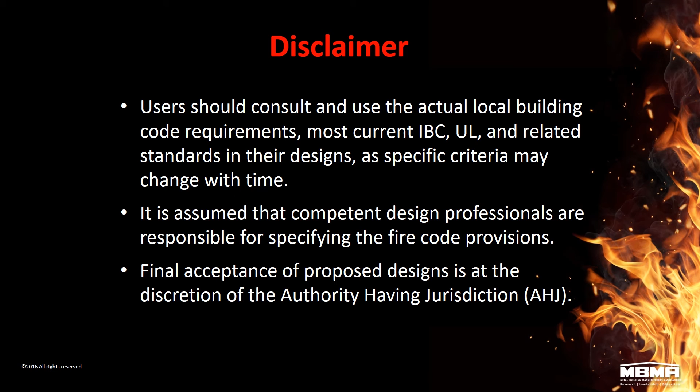Part 5 is exclusively on fire resistance rated joint assemblies as well as continuity joints, and we will discuss at length the important distinction between those—between a rated joint and just the ordinary, if you will, continuity joint.

The previous parts of this series: part 3 was on columns and roof-ceiling assemblies, fire resistance rated assemblies, sponsored by MBMA, and the preceding part 4 of this series was on fire resistance rated wall assemblies. Again, this is a 5-part series, and this is the final part of that series on joints.

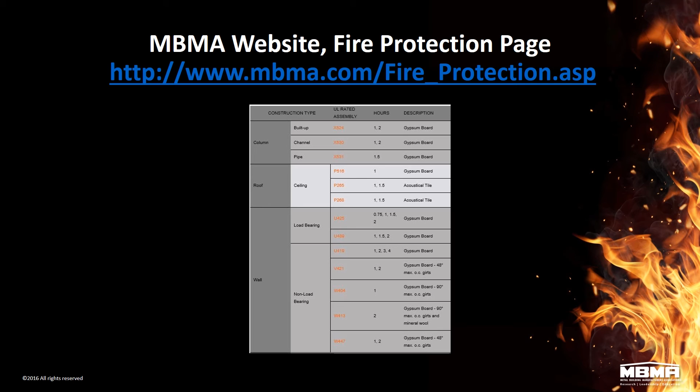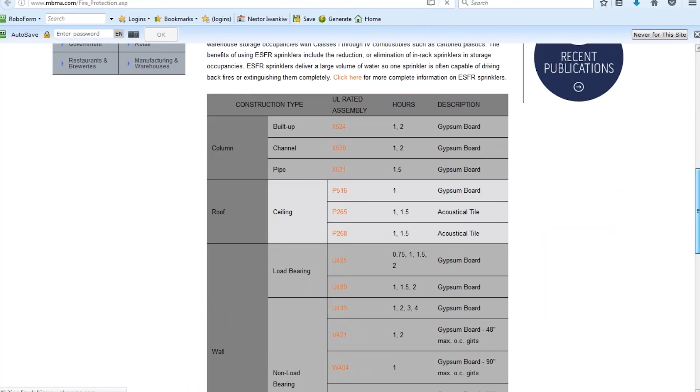So here is the MBMA website, and in particular the fire protection part of it. If we scroll down, we will see this table in its entirety, and towards the bottom of the table we get to the subject matter of this presentation, which is the joints—and here's all of them.

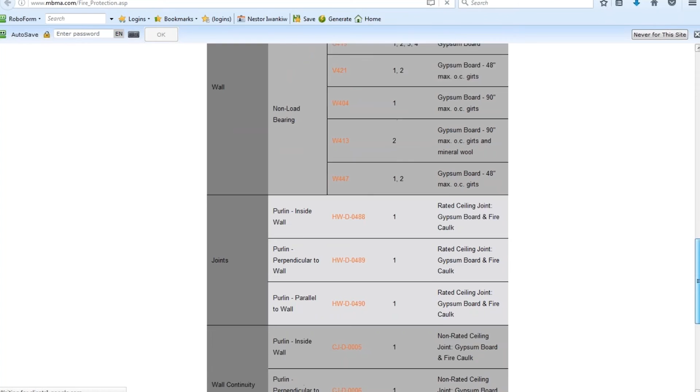So there are basically 6 assemblies that MBMA has sponsored and developed over the last 5 years or so. Some are the fire resistance rated joints—these are your HW assemblies. The other ones are what's called continuity joint systems, prefixed as CJ, so continuity joints.

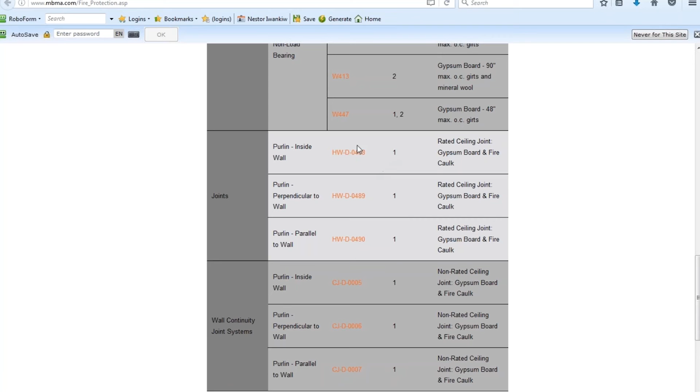A brief description and view of what they consist of. They're all for 1 hour, and if we click on one of these, we'll be directed to the UL online database, where we can see the complete assembly as specified by UL.

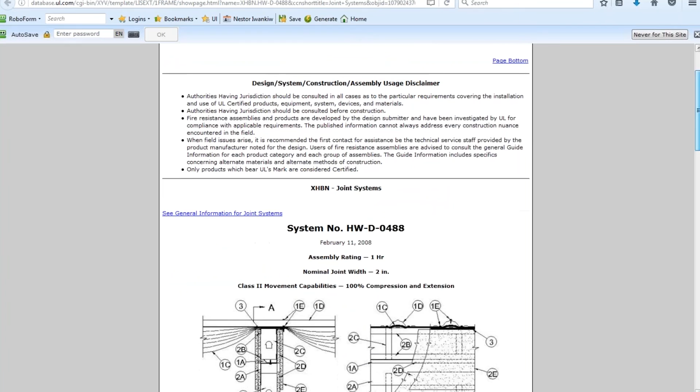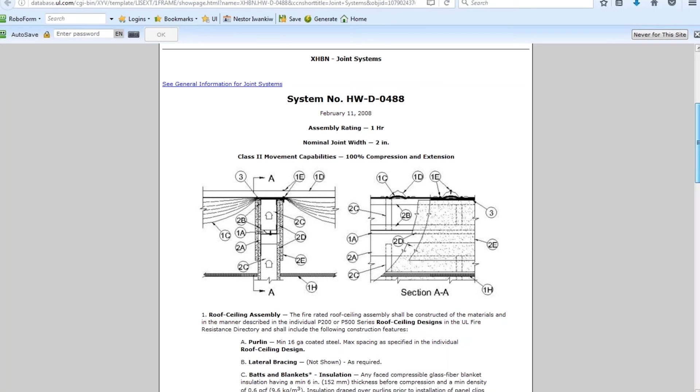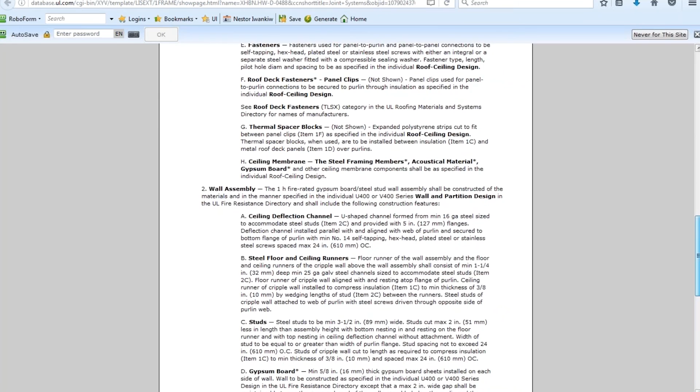Here you can see the head of wall, the cross-section view, the 1 hour rating, the nominal joint width, movement capabilities, and then the full listing with all of the components, items, and installation requirements for the head of wall assembly itself.

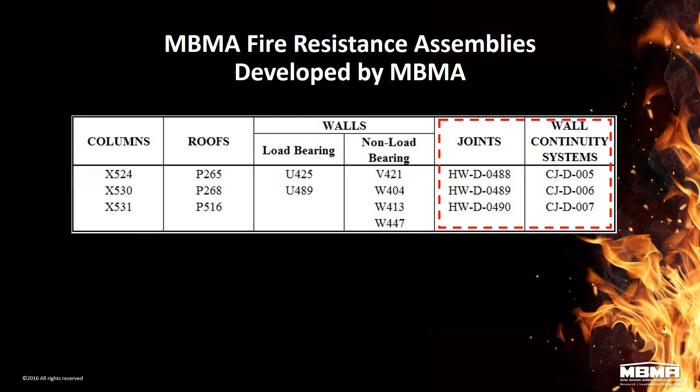So here again we just summarize and highlight these 6 assemblies. 3 of them are joints and 3 are wall continuity systems, and we'll describe what the difference is between them.

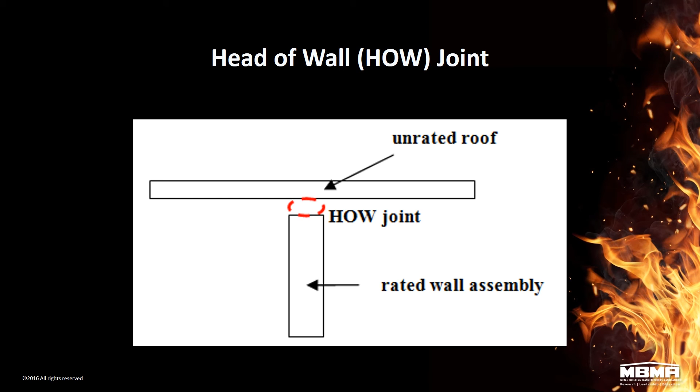So here's where your head of wall joint is in the building: it's the void or intersection between a vertical rated wall and a horizontal unrated roof. This is a typical construction condition encountered in metal building systems. You have a rated wall assembly either on the exterior of the building or within the building, and you have an unrated roof. So how do we install that joint, and what is the requirement?

Only joints were defined in the code, and those were defined as intersections between two fire resistance rated assemblies. So both assemblies had to be fire resistance rated, and the joint in between them had to be fire resistance rated. So the question arose, since typical metal building framing construction included rated walls meeting unrated roofs, where does that joint fit in, and how is it to be treated?

It really was a gray area, ambiguous in the code itself. There was a lot of discussion and confusion about what it really meant. MBMA sought a code interpretation from the ICC and received one, and we'll talk about it.

Following that, there was a numbering change in the 2009 IBC where the joints section changed location, but that's just editorial for our purposes.

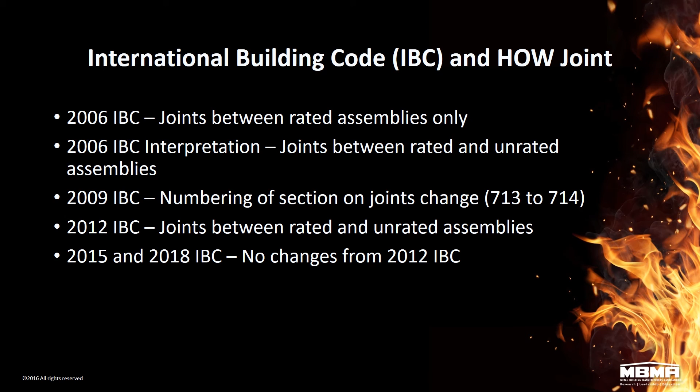Let's go a little more slowly through these points on the head of wall joint topic. In the 2006 IBC, there was a section requirement on fire resistive rated joints, defined as being between two fire resistive rated assemblies. These joints had to be tested and pre-qualified in accordance with either ASTM E1966 or UL 2079 standards.

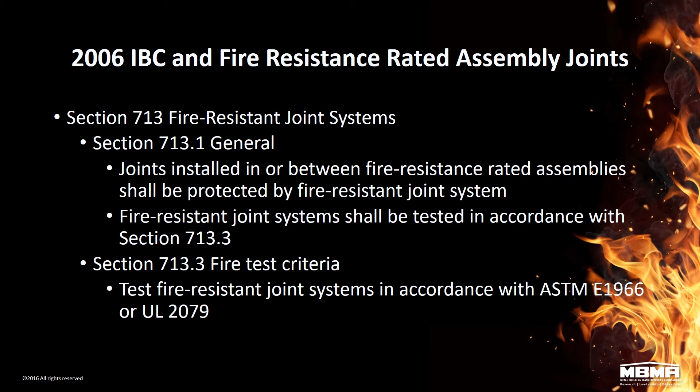The interpretation we sought from the ICC was: what is actually required when one has an intersection between a rated assembly and an unrated assembly? The response was that section 713.1 of the 2006 IBC is not applicable to such a condition.

All that is required at the intersection of a rated wall and an unrated roof is that the continuity of the specific building element under consideration—in this case the rated wall—be maintained up to the other intersecting element.

After this interpretation, and as a result of the questions and confusion in the industry on just what was needed, MBMA moved ahead to proactively test some particular joints at Underwriters Laboratories, to have at least something on the books that was tested and rated.

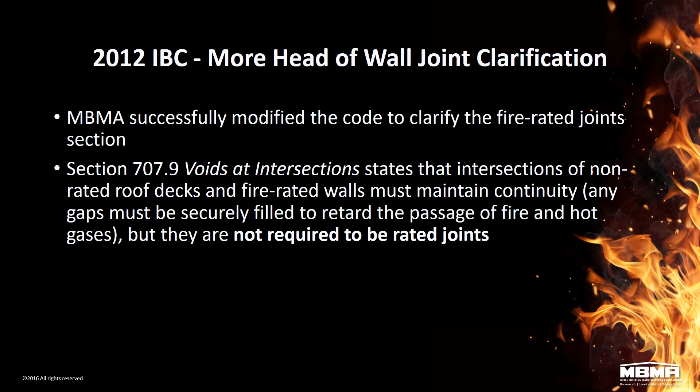So as long as you have a secure infill of that void space, and that material will prevent the passage of fire and hot gases, that is adequate for providing continuity between a rated wall and an unrated roof. That was first introduced in 2012, and that language continues in the code through now and into the foreseeable future.

More recently, ASTM E2837, a new standard specifically for situations of a rated wall intersection with an unrated roof, was issued. It's specifically called wall continuity, head of wall joints.

Since the issuance of the standard, UL has been testing new assemblies and issuing assemblies under that category of CJ listings. So there's a whole new set of assemblies for that specific application.

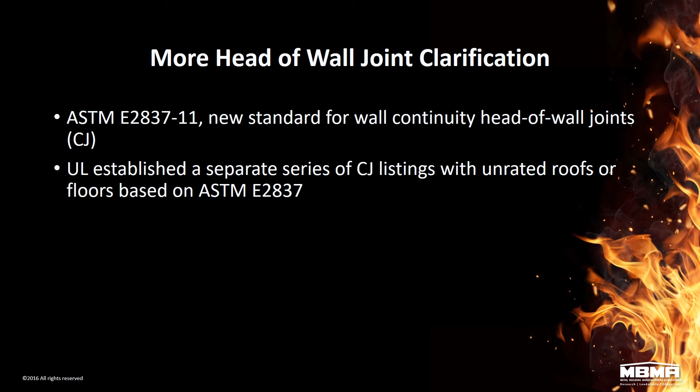Before the actual fire test, the test standard requires movement cycling to be conducted on the test assembly—a certain number of cycles, moving up and down to test the mechanics of the joint itself, ensuring nothing hangs up, fails, or damages the assembly. All of that went smoothly; the only damage was some surface paper scratches, no big deal.

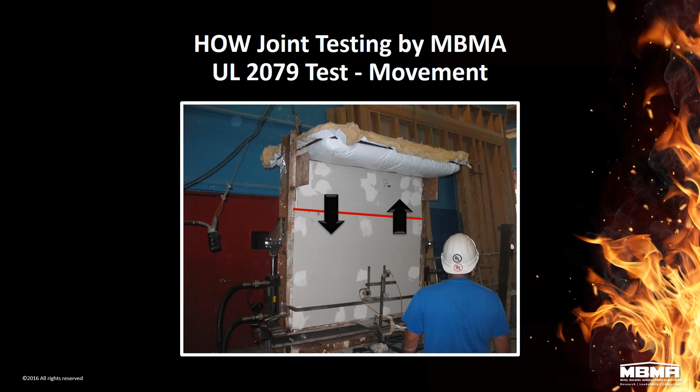That same assembly is then put into the furnace. The 1-hour fire exposure is conducted, temperatures are measured, and everything went well. To cap that off, the other test requirement is that the assembly must survive a hose stream test, which is important because it demonstrates the wall will stay intact and provide separation even during and after firefighters come in and fight the fire in the compartment.

You still want to maintain that compartmentation, and our assembly satisfactorily passed that test.

The rating was developed for this system. At that time, the only test standard UL could test to was the fire resistance joint standard, so the only listings they could issue were head of wall assemblies, which are joints between two fire resistance rated assemblies. We had 3 configurations listed.

We actually had 2 sets of tests, and they gave us the third assembly by engineering judgment and extrapolation. The 3 conditions were the joint directly under a purlin, perpendicular to a purlin, and parallel in between purlins. Those are the 3 conceivable situations one might encounter.

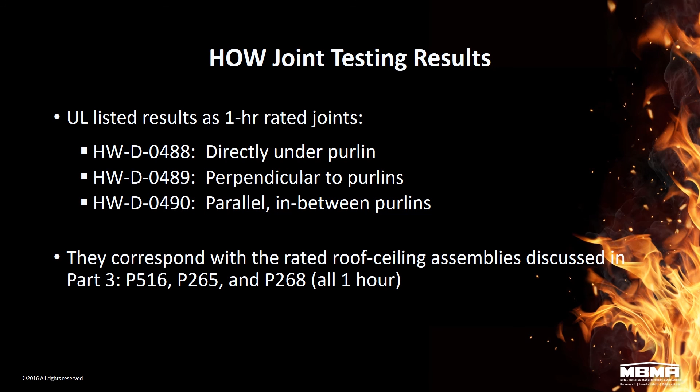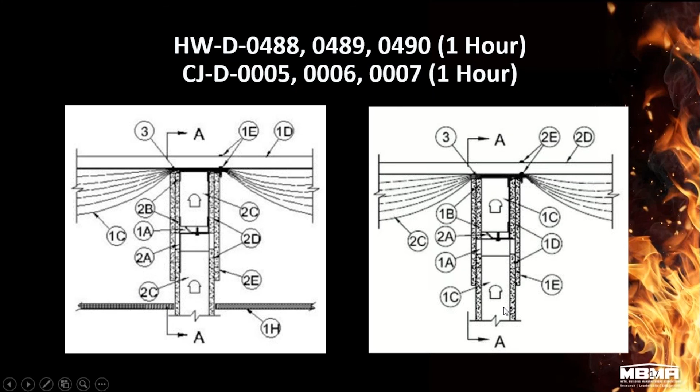So aside from whether you're dealing with a rated-to-rated head of wall situation, which requires a rated roof, or to the right a continuity joint system where you do not have a rated roof, the joint details are identical.

One interpretation and application issue we've had to issue recommendations on, as a result of inquiries to MBMA, is the potential use of these CJ joints—the continuity joints, which are rated for 1 hour—or for that matter the head of wall joints, also rated for 1 hour, if you have a 2-hour rated wall condition.

As a reminder, IBC section 707.9 states that any gaps between a rated wall and an unrated roof must be securely filled to retard the passage of fire and hot gases. It is silent—it does not say anything about a rating requirement or for how long that gap must be securely filled and retard the passage of fire and hot gases.

So the interpretation, and I think a valid one, is that there is no rating time required. Given that, use of a 1-hour rated CJ or HW joint, in our opinion, satisfies and exceeds that requirement because it has been demonstrated to actually perform its function for 1 hour, and the code is silent on any time interval for how long that joint must remain secure. That has been our interpretation and suggested application with 2-hour walls.

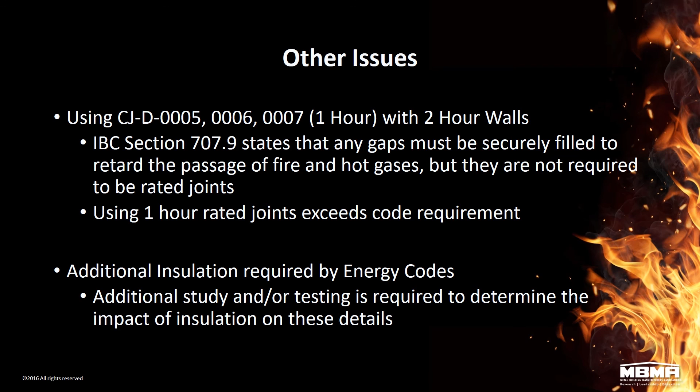There are some additional insulation issues prompted by the energy codes relative to this subject, and additional study and work will be forthcoming in the future on these details.

That concludes part 5 of this series. Thank you for your attention.